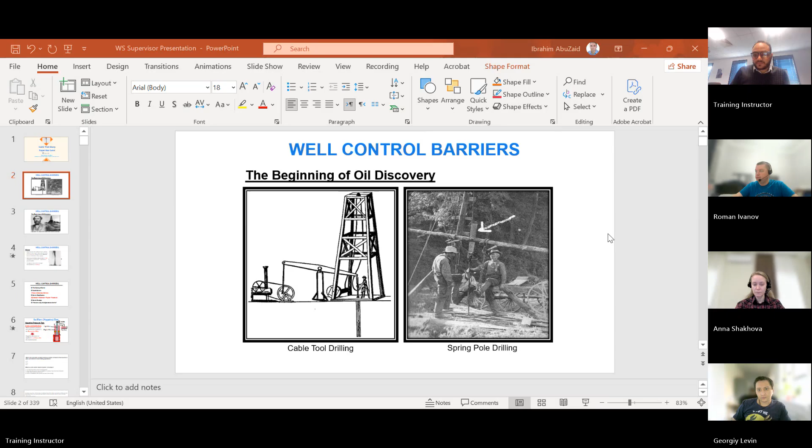Okay, today we are going to discuss the first part of the Well Sharp course. It's about the principles and procedures and equipment. It's a division related to the IWCF. But in the IADC workshop, we are going to start with the first part, which is well principles and procedures. Tomorrow we'll complete the second part, and on the third day we are going to discuss the equipment. On the fourth day, as mentioned in the WhatsApp group, we are going to discuss the simulator training. Okay, let's get started.

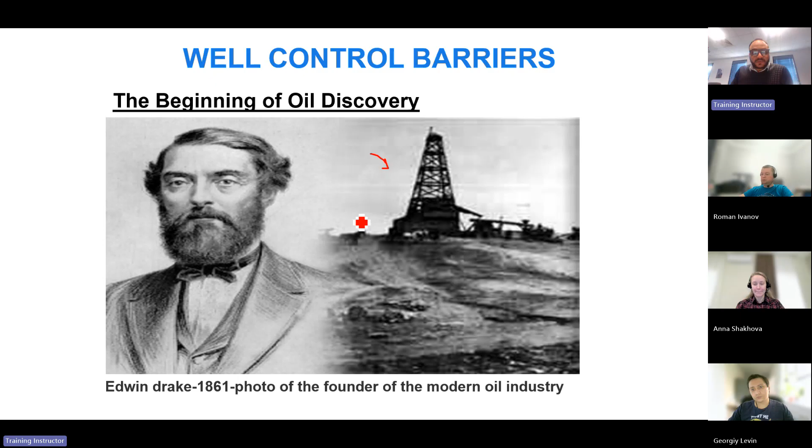As you know, at the beginning of oil discovery, people used old drilling techniques like cable tool drilling and spring pole drilling. After that, Mr. Edwin Drake came and invented this method, and he's considered the founder of the modern oil industry. Then people in this era faced many problems like blowouts, because there was nothing used to close or shut in the well, until Mr. Harry Cameron came in 1922 and invented the first BOP in history. This is the first BOP in history, it was a ram, no annular.

The API, IWCF and IADC came and set the rules of well control in general. And the first rule set by them is double barrier. We must have in all operations a double barrier. So what is the meaning of barrier?

The barrier is an object that prevents unplanned flow from formation to surface. Double barrier means we must have a primary barrier and a secondary barrier. The primary barrier is not always the hydrostatic pressure, or maybe it's a cement plug. So in general, we call the primary barrier the first object that prevents unplanned flow from formation to surface.

It's not always the hydrostatic pressure or the mud weight. Maybe the first object that faces the formation pressure is a cement plug. So to be more accurate, the primary barrier is the first object that prevents unplanned flow from formation to surface. The secondary barrier is the second object that prevents unplanned flow from formation to surface, usually it's the BOP.

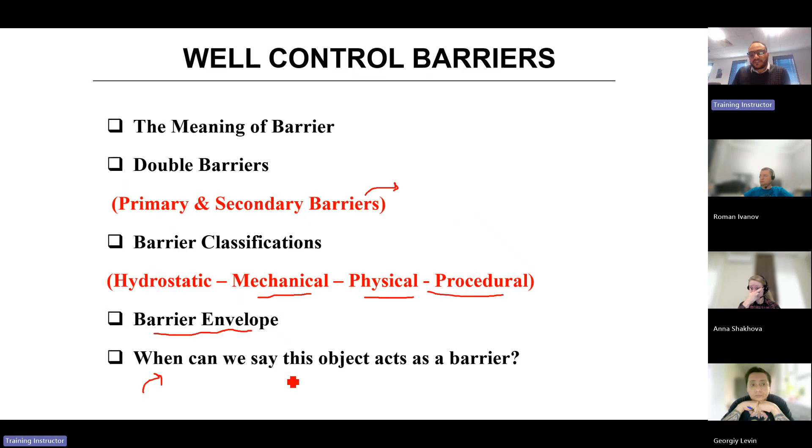To verify this object or any object acts as a barrier or not, it must be tested. So we have a positive test. Positive test means you can operate your pump where? In the direction of flow.

For example, we have a full opening safety valve. You can apply pressure from above and from below. From which direction will it be accepted by IWCF according to the criteria set by IWCF and IADC WellSharp? From the direction of flow, from below.

So I can apply pressure from above and from below on the full opening safety valve, for example, but it's accepted from the direction of flow. This direction of flow is called upstream or formation side.

So if I fail to conduct a positive test, to test this barrier, to make sure it's a barrier, to verify this object acts as a barrier - in this case, if you fail to apply a positive test, just apply a negative test. What is the meaning of negative test?

The IADC WellSharp and IWCF inserted a topic called liner lap. This liner lap is an application about the negative test or inflow test. So here we have a negative pressure test or inflow test.

After running your liner and making your cement job, here we have a packer, a hanger, and packer. Liner, hanger, and packer. The combination of hanger and packer is called liner lap.

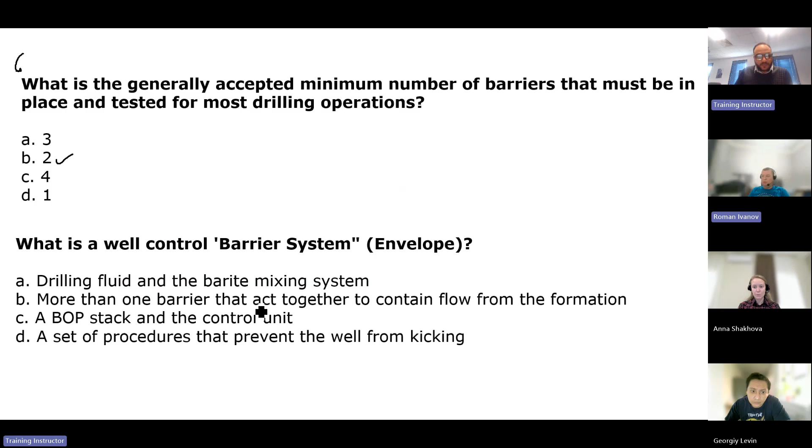Mr. Roman, what is a well control barrier system envelope? This should be B, more than one barrier that act together. Yeah, that's correct, more than one barrier.

Miss Anna, you have a set liner and are now circulating the well to clean mud before drilling out the liner shoe. Where is the potential leak path to allow formation fluid to enter the well? Drill string, BOP, leaking liner. Okay, leaking liner lap or shoe. Yes, C, correct answer. Your turn, Mr. Roman.

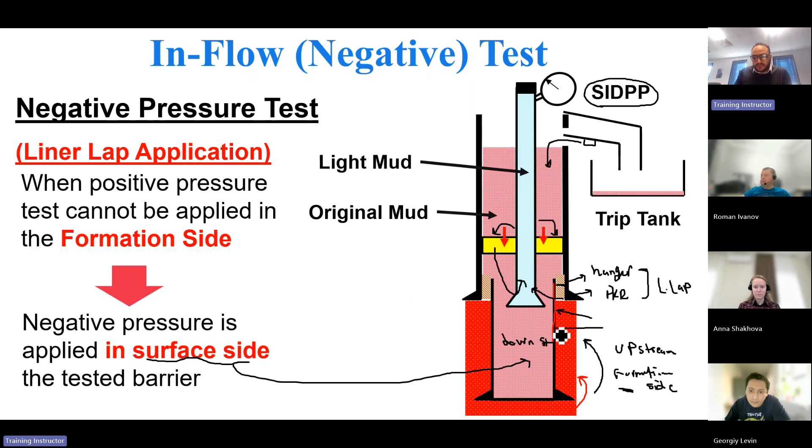Mr. Roman, your turn. Okay, what is a negative test? Just a second. Should be B, yes, B answer. The pressure in the upstream or formation side must be greater than the pressure in the downstream or surface side. Yes, B answer.

Why is a negative test performed on a cement plug or a liner lap, Mr. George? C, to check for cement integrity. Yeah, integrity, the source of leak.

Anna, which of the following is considered a procedural barrier? Maybe monitoring the well for gains or losses. Yes, sure, monitoring for gains and losses.

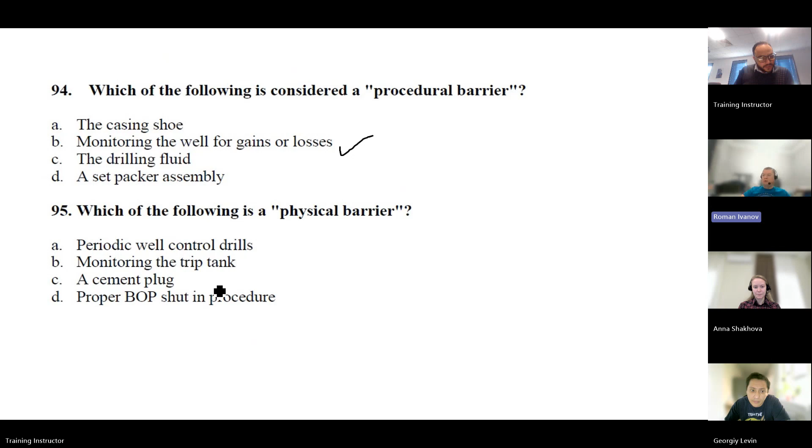Which of the following is the physical barrier, Mr. Roman? Physical barrier will be cement plug. C, yes, cement plug.

Your turn, Anna. If the well is swabbed in when tripping, which type of barrier has failed? Hydrostatic barrier. Hydrostatic barrier, yes.

So this tagging is a method to verify, and this tagging is considered as set by the barrier criteria. Yes. Okay, so negative test, positive test, and tagging.

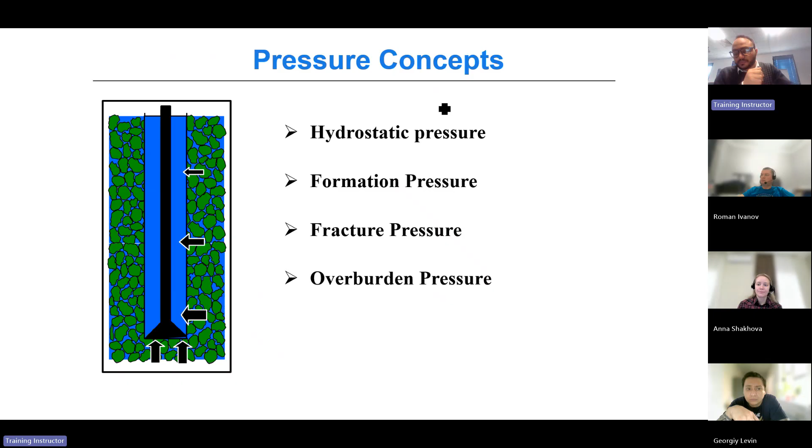Okay, as you know, we'll talk about the pressure concepts. We have a large conflict between the hydrostatic pressure and the formation pressure. The hydrostatic pressure is calculated by this formula: 0.052 multiplied by mud weight multiplied by the true vertical depth. This constant depends on the units of the mud weight and units of the true vertical depth.

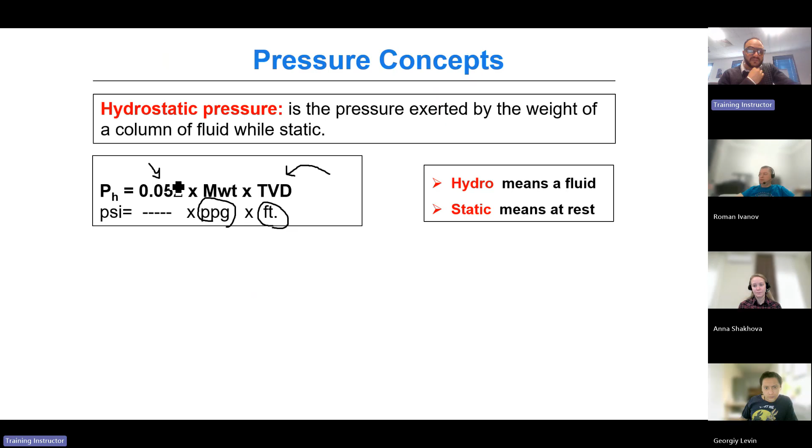If you have the mud weight in ppg and true vertical depth in feet, the constant will be 0.052. And if you change, for example, the mud weight to PCF, the constant will change too.

So the formation pressure is the pressure of the fluid which is in the pore spaces. In all operations, if I want to calculate the formation pressure, how can I know it? If you want to calculate the formation pressure, just use the same equation as the hydrostatic pressure.

Because scientists suppose all formations contain salt water. For example, the mud weight of the salt water is 8.95.

So the formation pressure is different from one area to another. Why? Because we have different depths, different fluids inside the pore spaces, and different stresses. But the scientists assumed that all formations contain salt water. This is the normal case — if you want to calculate the formation pressure, just use the same equation as hydrostatic.

For example, if I want to calculate the formation pressure after 1 drill foot, the formation pressure will equal 0.052 multiplied by 8.95 multiplied by TVD. So at 1 foot, the formation pressure, you will get this value, 0.465. So this is the pressure after 1 drill foot. So each drill foot, your pressure will increase by the same value, 0.465.

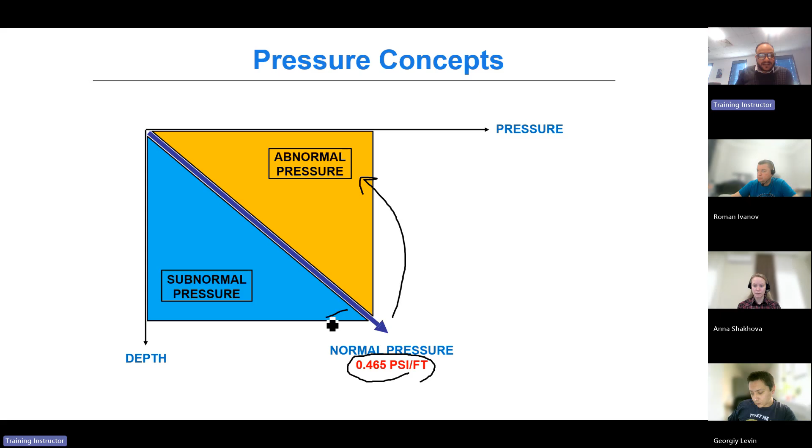So if I want to calculate the gradient, just divide your pressure by depth, or multiply the constant by the mud weight. If the gradient is greater than the normal value, which is 0.465, it's called abnormal or above normal. If it's less than this value, it's called subnormal or below normal.

Yeah, let's discuss these questions about the last part. Mr. George?

If you change mud weight units from ppg to PCF (pounds per cubic foot), what change will you have to make to the formula? Use mud weight to vertical TVD, or replace with a different constant? Yes, we will replace with a different constant. For example, if you want to calculate the hydrostatic pressure using specific gravity instead of mud weight, use 0.433 multiplied by specific gravity multiplied by TVD in feet, and this will give the hydrostatic pressure in PSI. There are a lot of units and constants to keep in mind.

Okay, the second question, Mr. Roman. Hydrostatic pressure is... pressure should be A, stationary column of fluid? No, sorry, C, pressure exerted by a column of fluid, yes. Correct, pressure of the fluid column, yes.

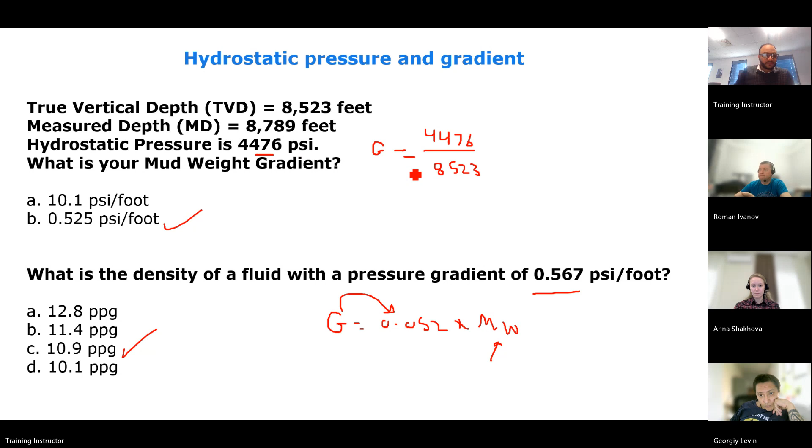Okay, we have 3 cases, as you know. We have the formation pressure greater than the hydrostatic pressure, that's called underbalance. If both are even, it's balanced, and if the hydrostatic pressure is greater than the formation pressure, it's overbalance.

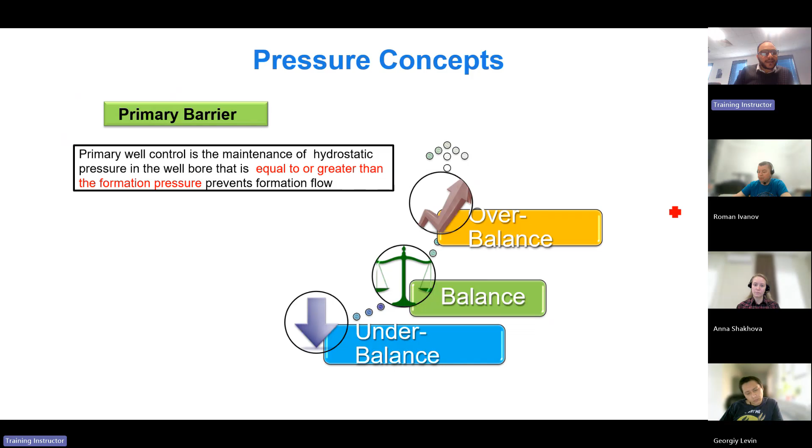Okay, look at this. Let's discuss the question first. Miss Anna.

What is it called when formation pressure is greater than the hydrostatic? Okay, it's overbalance... no, wait, it's under. Underbalance, yes. Mr. Roman.

What is it called when formation pressure is the same as the hydrostatic? Balanced pressure, yes. What is the definition of abnormal pressure formation, Mr. George?

The formation pressure that is greater than the hydrostatic pressure caused by the full column of formation water, and the potential of getting underbalanced in this abnormal pressure formation is high.

And the most important question here: when you have gas inside the well, is it considered a kick or not? No. Okay, how can we confirm we have a kick? We need to do a flow check.

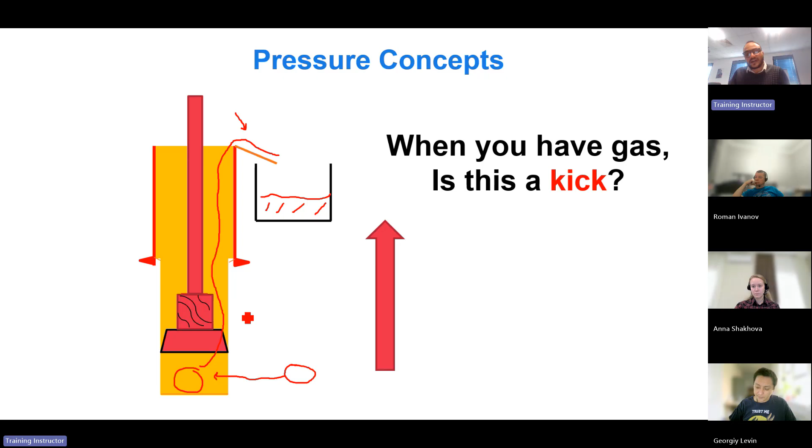Entering of formation fluid into the wellbore is called influx. If this influx causes the well to flow, that means you are underbalanced and you have a kick. The kick means you have an increase in the return flow and a gain inside your tank.

The blowout, as you know, is an uncontrolled kick. Uncontrolled kick means blowout.

Most formations that have to be fractured to produce contain what? Oil and gas? Yes.

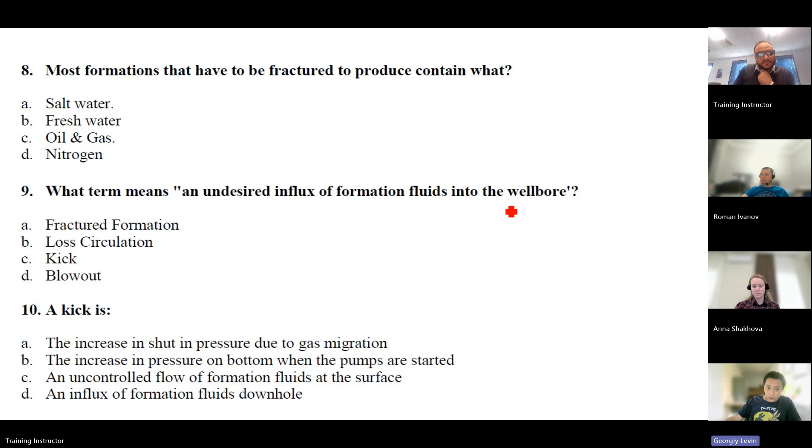What term means an undesired influx of formation fluid into the wellbore? Fractured formation, lost circulation, kick, or blowout? Kick. Yes, kick. Uncontrolled kick means blowout, but undesired influx means kick.

But we have a complement for this definition. Undesired influx causes the well to flow - it must be mentioned. So it's a kick. Anyway, it's a kick.

It's undesired influx, and influx of the formation fluid downhole, yes.

Uncontrolled flow of the formation fluid at surface. Kick?

Uncontrolled, you mean? But why? Uncontrolled means... I would say it's a kick. Blowout - it's a kick, not blowout. It's a kick, okay. This is the definition of blowout, not a kick. Kick, you're correct - it's an influx of formation fluid down.

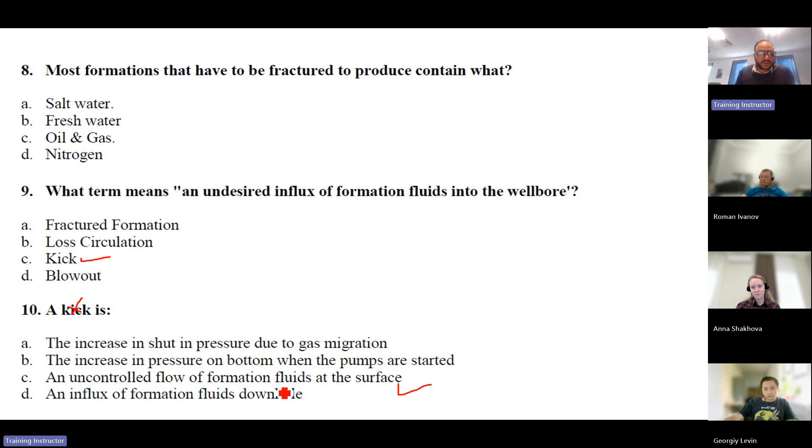What term means uncontrolled flow of formation fluids? It's a blowout. Yes, blowout.

Blowout. Yeah. What is the bottom hole pressure? Mr. Roman, so bottom hole pressure?

The first one, A: total pressure exerted on the bottom of the hole. Yeah, all pressure exerted on the bottom hole - this is the bottom hole pressure.

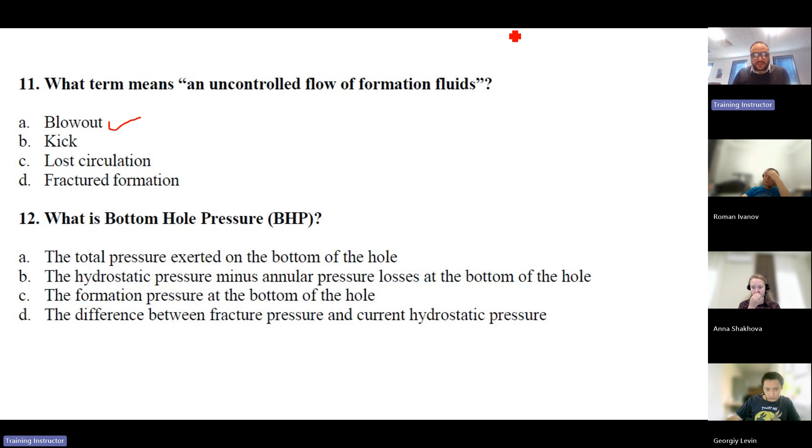The upper limit is the fracture pressure and the lower limit is the formation pressure. If you get below the formation pressure or pore pressure, you will have an influx or kick. And if you exceed the fracture pressure, that means you have losses. After losses, your hydrostatic pressure will drop, then you will have a kick.

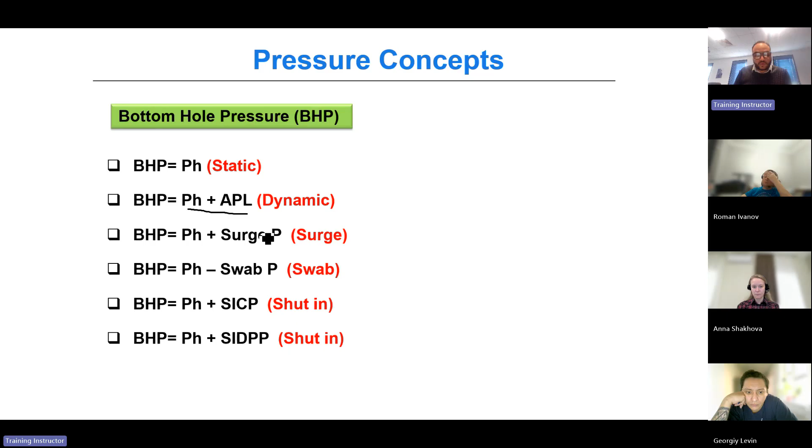In case of surge, running in the hole too fast, it equals hydrostatic plus surge, and hydrostatic minus swab in case of swab, pulling out of the hole too fast. But while shutting in the well, let's take an example here.

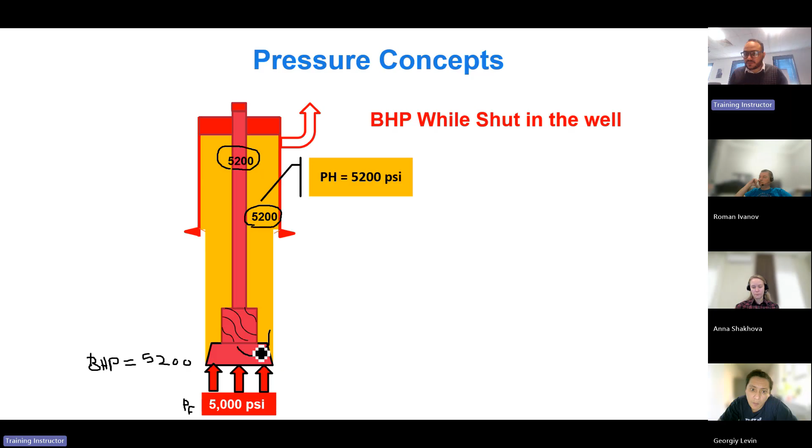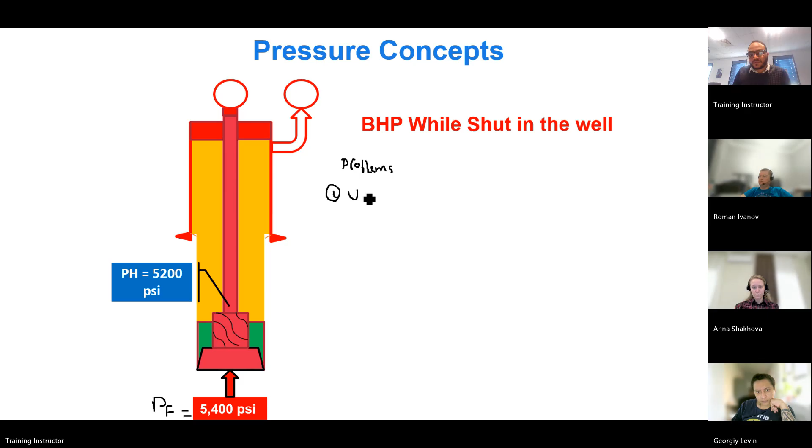After encountering an abnormal pressure formation, the formation pressure here is 5,400 psi. Now, in this case, you're underbalanced. You have problems here. What are these problems? The first problem is you are getting underbalanced. Underbalanced by how much pressure? 200 psi. So this is the first problem.

The second problem is the formation will not let you free - it will give you gas. The gas will enter the string or the annulus. Will the gas go to the annulus? Why? Because in the drill string you have a float valve - but that's not the main reason. Having a float valve, you have a large area in the annulus, but the nozzle of the bit is very small, so the gas will prefer the large area - no gas inside the string. Even if you do not have a float valve, the gas will still be in the annulus. So we have a problem: underbalanced by 200 psi and gas inside the annulus.

Okay, what is the action of the driller now? If you have gas inside the well, the gas will enter the annulus. The hydrostatic pressure inside the annulus was 5,200 psi. The mud is replaced by gas. So entering gas in the annulus affects the hydrostatic pressure of the annulus, not the string. Let's assume it becomes 5,100 psi. So entering the gas inside the annulus reduces the hydrostatic pressure of the annulus by 100 psi.

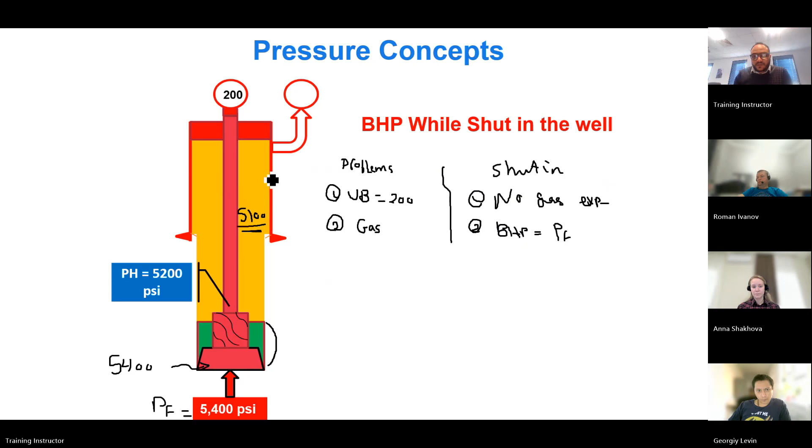If you have a shut-in well, formation pressure equals bottom hole pressure. Let's do it. I have here 5,100 psi from the side of annulus, so I need a back pressure, casing pressure, 300 psi. So this side, the annulus side, is stabilized now. It's equal 5,400. What about the string side? You have a hydrostatic pressure of 5,200 psi, so you need a back pressure of just 200 psi.

What is the value of shut-in drill pipe pressure represent? We can calculate actual bottom hole pressure, formation pressure, based on this extra 200 psi.

Yes, the underbalanced value. So if I tell you the shut-in drill pipe pressure equals zero, that means I do not have a kick. I just have gas inside the annulus, and the casing pressure will be with another value. For example, if you have a shut-in drill pipe pressure of 0 psi, shut-in casing pressure 200 psi, that means you're overbalanced. Why? Because the shut-in drill pipe pressure value represents the difference between the formation pressure and bottom hole pressure, the value of underbalance. So if it's 0, I'm overbalanced.

But now this shut-in drill pipe pressure is 200 psi, shut-in casing pressure is 300 psi. That means the shut-in drill pipe pressure represents the value of underbalance. What about this 300 psi? It's equal to 200 plus 100. This 300, the casing pressure, represents the value of underbalance plus the hydrostatic pressure reduction, which is compensated by closing the well. So the hydrostatic pressure reduction, due to gas entering inside the annulus, is compensated by more closing from the side of the annulus. Does that make sense?

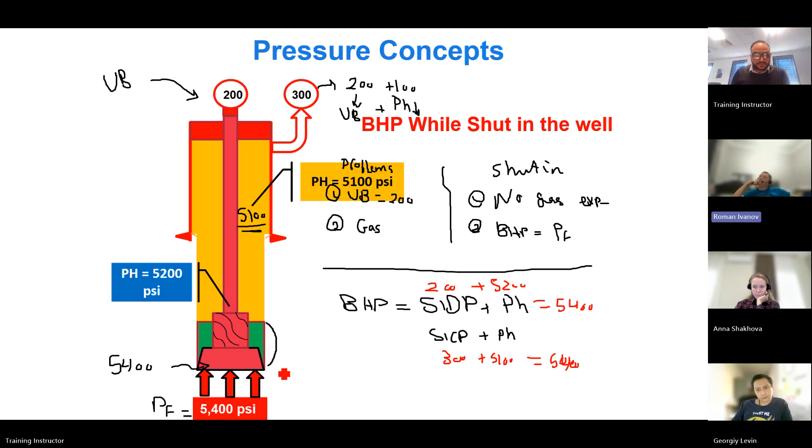Okay, as you can see here, the bottom hole pressure in case of static equals the hydrostatic only. And in case of dynamic, if you have 2,000 psi coming from the pump, you will have pressure losses till you have a large pressure loss across the nozzle of the bit, and you will still have APL inside the annulus. Bottom hole pressure in case of dynamic will be equal to the hydrostatic pressure plus APL.

So now we have a term here. Look at this. If I want to derive a mud weight from the bottom hole pressure, static bottom hole pressure, any pressure you want to convert to mud weight, just take your mud weight and divide the pressure by 0.052 multiplied by TVD, as you know. It's very simple. And this is bottom hole pressure, bottom hole pressure is static.

So this mud weight will be static, and this is the first mud weight we will deal with. We have different mud weights in well control: static mud weight, dynamic mud weight, maximum allowable mud weight, and kill mud weight. We have at least 4 types of mud weights: mud weight static, mud weight dynamic, maximum allowable mud weight, and kill mud weight.

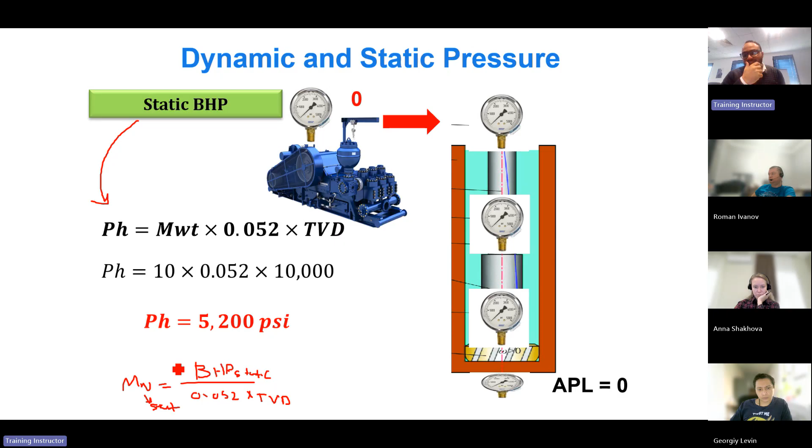Okay, if you derive the mud weight from the bottom hole pressure static, it will be mud weight static. And if you want to derive a mud weight from bottom hole pressure dynamic, it will be mud weight dynamic, which is called what? Annular pressure equivalent circulating density, ECD. So ECD equals mud weight dynamic.

For example, if I tell you the static mud weight equals 10 ppg, and I have an APL of 200 psi, if you convert this 200 psi to mud weight and add it to your static mud weight, you will get the ECD. Let's assume the ECD is 10.3 ppg, and you have a leak-off test conducted on an exploratory or wildcat well, an exploration well.

From this wildcat well, we get the maximum allowable mud weight. If you mix and drill with a mud weight higher than this maximum allowable mud weight, your well will be fractured. So the maximum allowable mud weight is 10.2 ppg. As you can see, you can calculate the equivalent circulating density, or your dynamic mud weight, very easily. But what is the benefit of knowing this ECD value? I need your input.

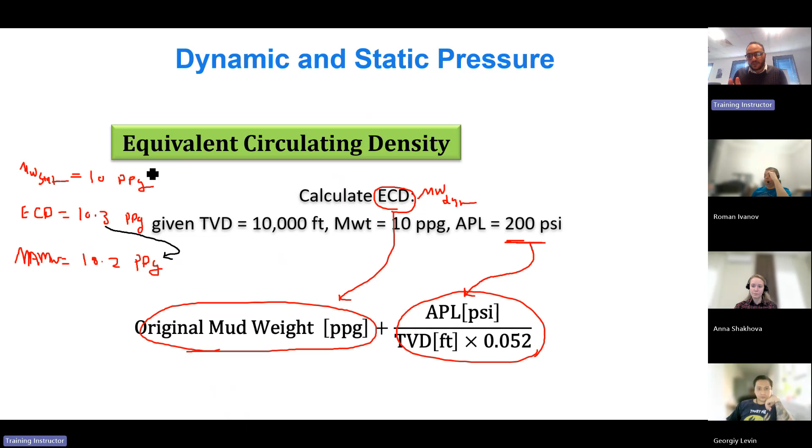But if you operate your pump, what will happen? Your mud weight now, as you can see, is 10.3. You exceed the value of the maximum allowable mud weight. So when you're static, you will not fracture the formation, but when you're dynamic, you will fracture the formation. So the value of ECD is used to compare to the maximum allowable mud weight.

We have simple equations: if you change your mud weight, the pump pressure will change too, and also if you change the strokes per minute, or pump speed, the pump pressure will change too. For example, if you have 2,600 psi pump pressure and you change your mud weight from 10 to 11 ppg, and you want to calculate the new pump pressure, it will equal the old pump pressure multiplied by the new mud weight divided by the old mud weight. P new over P old equals mud weight new over mud weight old. Let's calculate it.

2,600, I think it's calculated here, it's solved here. 2,600 times 11 by 10, this is the new mud weight divided by old mud weight. So this is the new pump pressure.

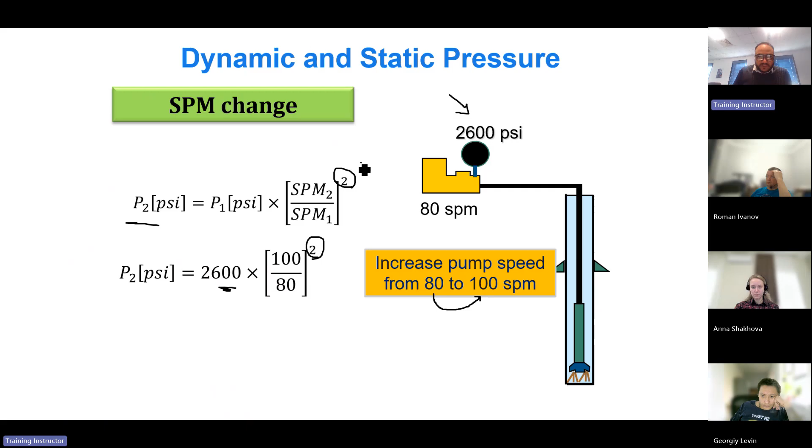Also, if you changed your strokes per minute from 80 to 100 with the same old pressure, you can get the new pump pressure by using the old pump pressure multiplied by the new strokes per minute divided by the old strokes per minute, raised to the power of 2. Don't forget that, please. So this is the new pump pressure.

What effect does increased pressure have on fluid density? What effect does increasing pressure have on fluid density? It decreases the fluid density. It does not affect the fluid density. It increases the fluid density. We didn't explain this, let's explain it now.

If you increase the pressure on fluid density, what will happen? He's asking you about the ECD, equivalent circulating density. If you increase the APL, what is the new value of the fluid density? It will increase, okay, increase, yes. But if you increase the temperature, increasing temperature will increase the viscosity... no, it will decrease the viscosity. So it will lead to barite settling or barite sagging, and your hydrostatic pressure will drop.

So increasing the pressure on the fluid density will increase the fluid density. Increasing the temperature will decrease the fluid density. Make sense? Yes, okay, so it increases the fluid density.

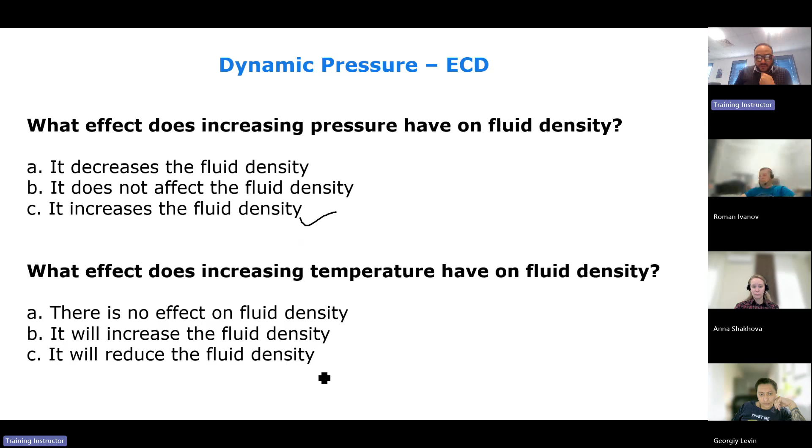What effect does increasing temperature have on the fluid density? It will reduce the fluid density. Yes, Miss Anna.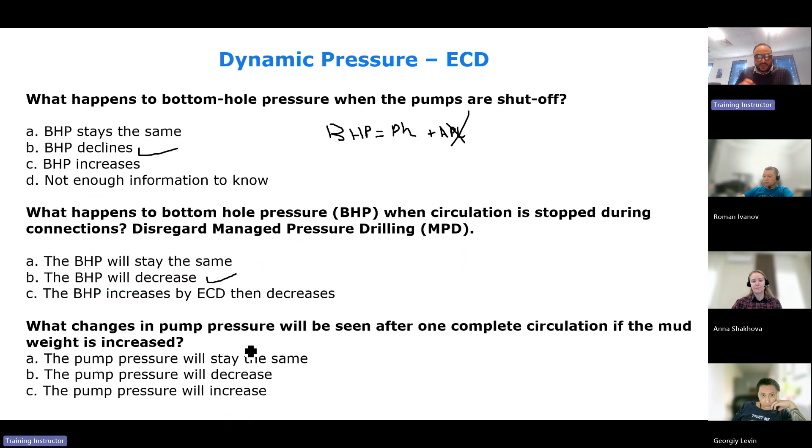What changes in pump pressure will be seen after one complete circulation if the mud weight is increased? Same, decrease, or increase? The pump pressure will increase, since we have a proportional relationship between pump pressure, mud weight, and strokes per minute. So it will increase.

This is one of the most famous questions in the IADC chart: holding 1,200 psi at the surface will have the most effect on mud weight on which well?

Have you remembered the last question about increasing the pressure on the mud weight? Does it increase the mud weight or decrease it? Increase the mud weight. Okay, but what if you have 1,200 psi pressure holding or applied on the shortest well?

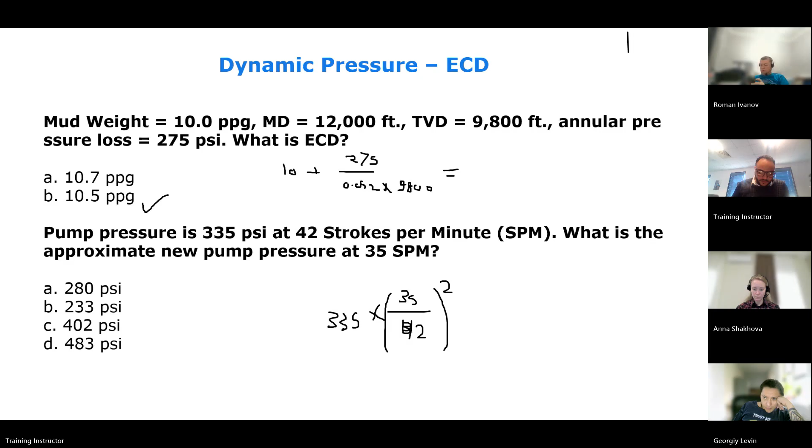35 divided by 42 squared, right? Yes, 35, 42, squared, multiplied by the pressure. 232. Well, it's B if the answer is rounded up. 35 divided by 42, 232, yeah, 233 is rounded up.

Right, yes Mr. Roman. Okay, while circulating a kick, we are instructed to decrease pump rate. Okay, so strokes divide 20 by 25, 0.8, power 2, okay, 0.64. Now multiplying final circulating 320, okay, by 320, 205, D is the answer, rounded up also.

Yes, so George. While pumping at 50 strokes per minute, the standpipe pressure reads 1,250. The previous standpipe pressure will increase, B, 1,800. B is the answer, B. Yeah, okay.

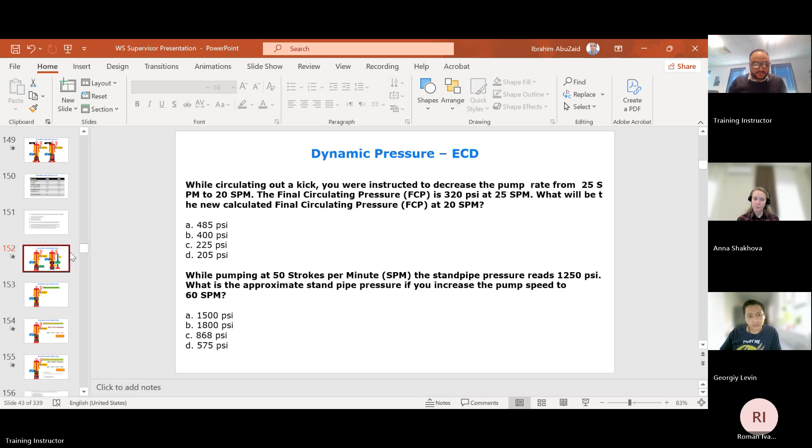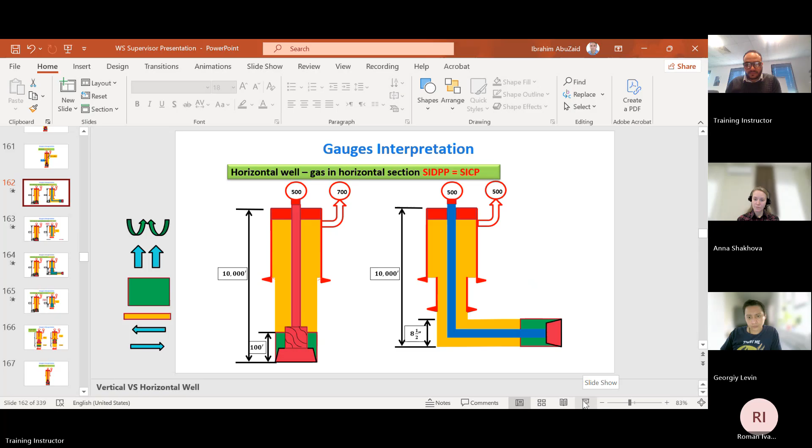We'll discuss it in the gauge interpretation, but I will tell you now. If you have a kick inside the horizontal section, shut-in casing pressure will equal shut-in drill pipe pressure. Why? Because the gas inside the horizontal section has no expansion—there is no expansion for gas inside the horizontal section, so there is no effect on the hydrostatic pressure inside the annulus. So this is the first case of shut-in drill pipe pressure equal the shut-in casing pressure.

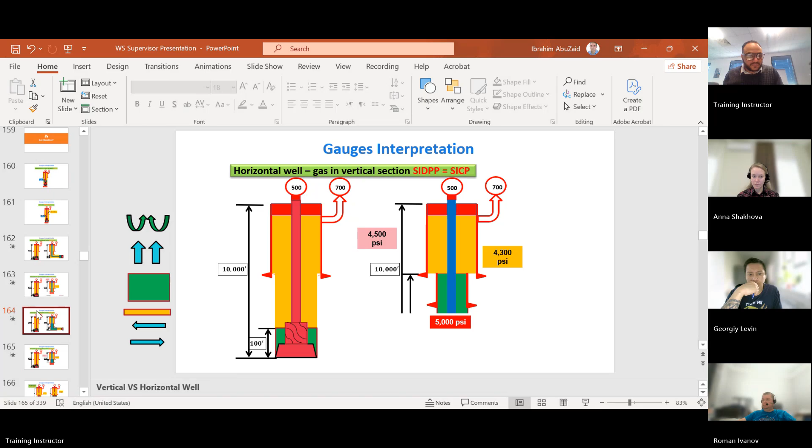And the second case, the casing pressure equals shut-in drill pipe pressure if your string is off bottom and you have a gas, because the effect of gas will be on both. So if your bit is off bottom, shut-in casing pressure will equal shut-in drill pipe pressure. And if you have gas inside the horizontal section, shut-in casing pressure will also be equal to shut-in drill pipe pressure.

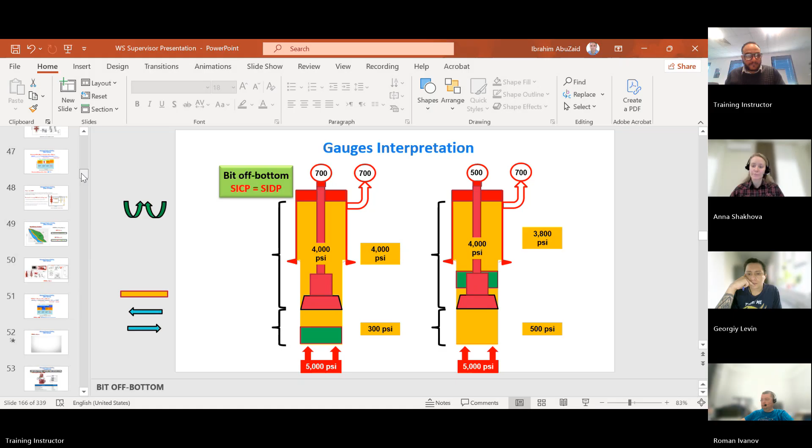We have here theoretical topics like MPD, managed pressure drilling. It's mentioned in the IADC WellSharp as a theoretical topic—there's no more calculations inside it—and also kick tolerance. This topic is not included for your information; it's not included in the syllabus of the IWCF, MPD and kick tolerance are not included in the syllabus of the IWCF.

Here in MPD, managed pressure drilling, we have different types or methods of MPD. But the method mentioned in the syllabus of the IADC WellSharp is called surface back pressure, SBP. We have two types of windows: we have a large drilling window when you have fracture pressure and formation pressure here—a large drilling window.

In case your bottom hole pressure is static, it's equal to hydrostatic pressure only. And in case of dynamic, your bottom hole pressure dynamic equals bottom hole pressure static, which is hydrostatic plus the APL, or friction losses. So this is conventional drilling: bottom hole pressure in case of static equals hydrostatic, and in case of dynamic equals hydrostatic plus APL. And we have a large drilling window in conventional drilling.

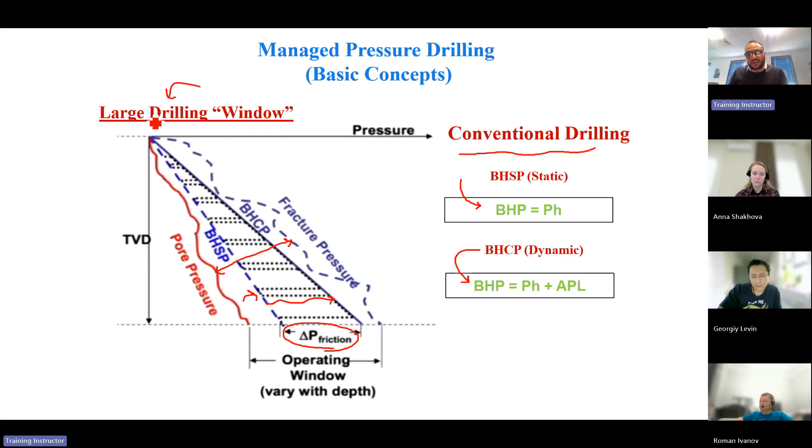If you want to look at the bottom hole pressure and want to increase it, you do not have more choices like MPD, like surface back pressure. In surface back pressure MPD, you can make a manipulation because you have different factors to control. But here, in case of drilling, I only have APL and hydrostatic pressure. During connection, you lose this circulating friction, which is APL—you lose it. So the potential of taking connection gas during connection is high. You cannot increase your bottom hole pressure in case of connection; you don't have the APL, only the hydrostatic.

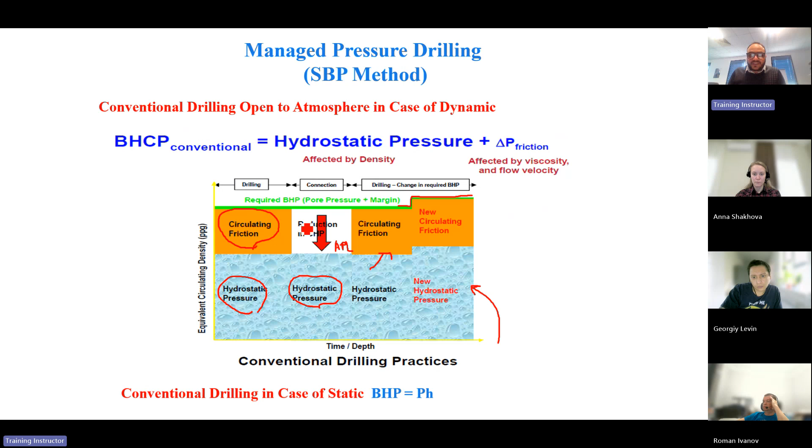No other factors. But in case of MPD, which is a closed loop or closed system, the benefits of using MPD are that it enables us to drill with more consistent bottom hole pressure, and also aids to mitigate pressure-related non-productive time events and enables the well to be drilled within a tight window. Let's discuss it in detail.

So we must use MPD, a closed system. Look at the layout. The bottom hole pressure in the closed system equals the hydrostatic pressure plus back pressure, in case of static, using the closed system MPD. In case of dynamic, it's hydrostatic pressure, back pressure, and APL from the pump.

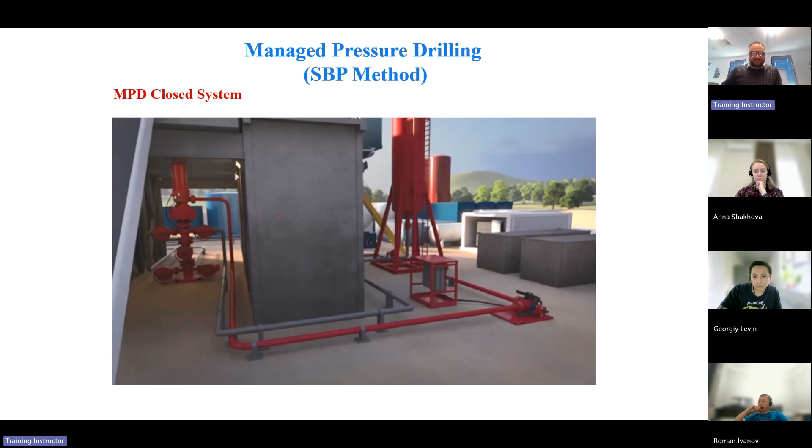Take control of your onshore drilling operations with purpose-built and cost-effective closed-loop technologies. The Weatherford Pressure Pro control system enables basic capabilities for managed pressure, underbalanced, and flow drilling operations, so you can work safer, faster, and more economically.

The system features a Weatherford Safe Shield rotating control device, or RCD, which creates a pressure-tight barrier in the wellbore annulus to contain and divert drilling returns for enhanced safety.

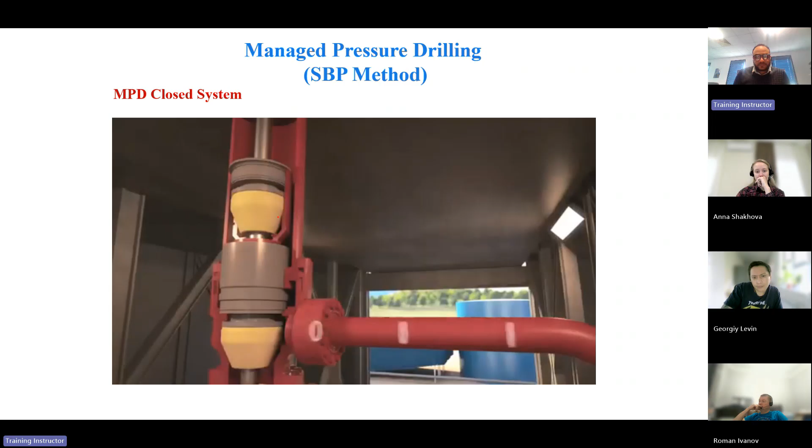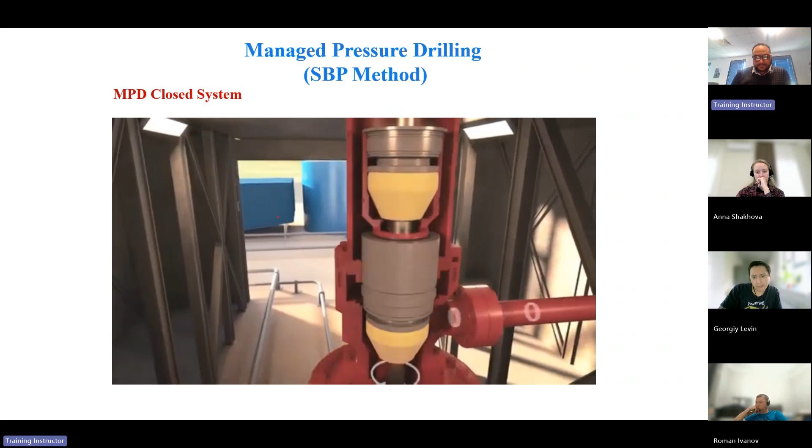Our Safe Shield 5M model offers design improvements in liquid and gas drilling environments, including a short stack height, large through-bore diameter, and high pressure ratings up to 5,000 psi. A remote latching system and a self-lubricating bearing assembly both eliminate the need to work below the floor. A rotating flange reduces rig-up time, and an interchangeable bowl adapts to a range of flange configurations.

The Pressure Pro system also features the electric set point choke, which provides precise semi-automated pressure control that reduces manpower. As pressures vary in the wellbore, the choke automatically adjusts its position to maintain the pressure set point. Our OneSync software platform integrates with the Pressure Pro system so that you can create ramp schedules to increase the accuracy of wellbore pressure management during connections.

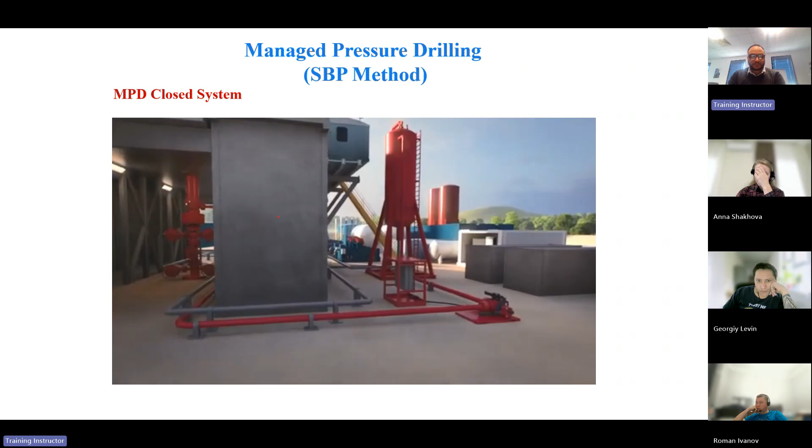With the Weatherford Pressure Pro control system, you can proactively manage wellbore pressures to mitigate well control incidents, minimize non-productive time, and reduce mud costs.

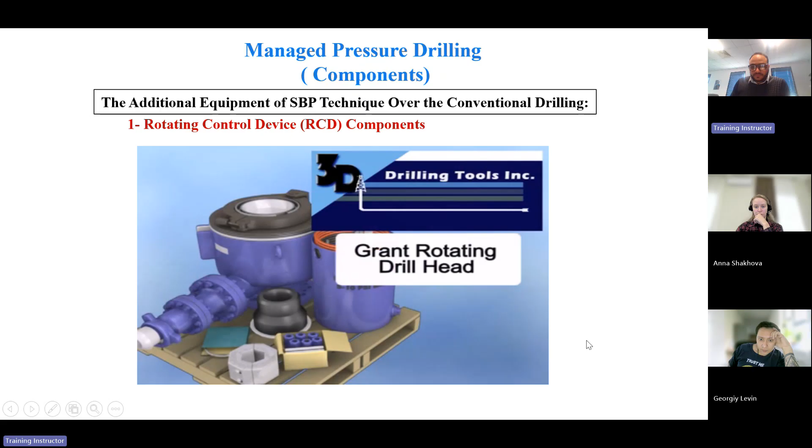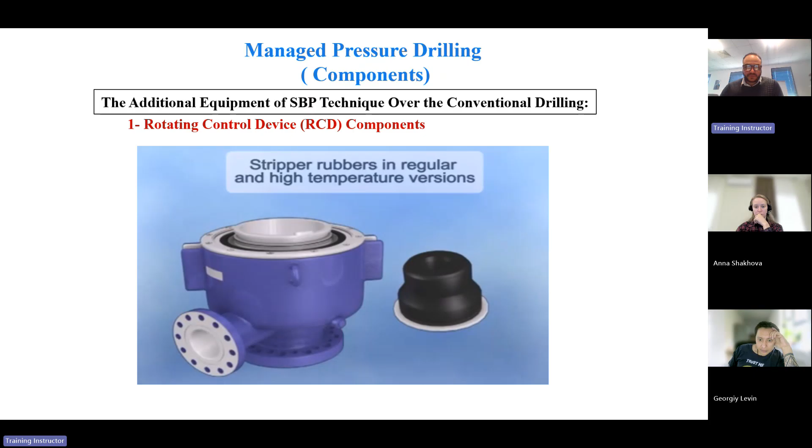Yes, this is a sealing element. This is the rotating head, bearing assembly in the rotating head, and the clamp. And this flange suits the rig.

Okay, this is a rig-up of the RCD, rotating control device, over the annular. This is lowering the RCD bearing to the RCD bowl, or to the rotating head.

I think we missed Roman. Mr. Roman? Yeah, sorry, I got a blackout at home. No, electricity blackout, just reconnected, yes.

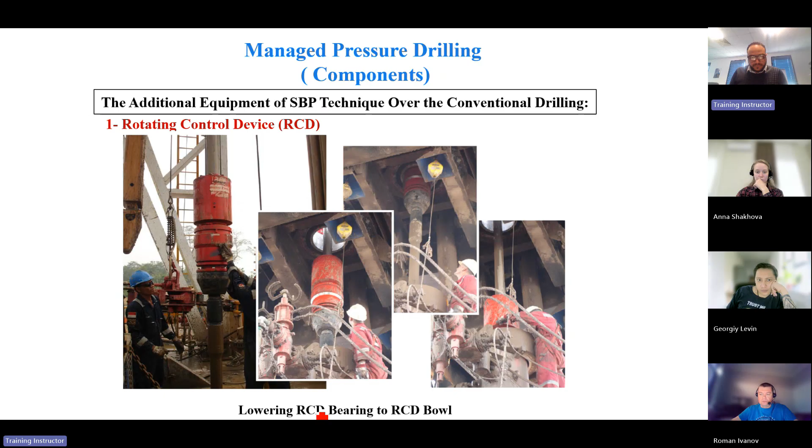No problem. Okay, this is the lowering of the RCD bearing to the RCD bowl. Okay, this is during the rig-up and function test of the RCD.

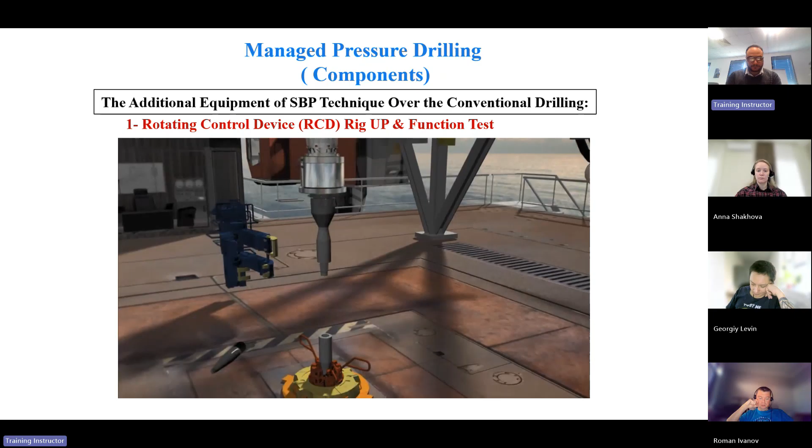Running tool of the RCD sealing element and RCD assembly, bearing assembly. And it will be run inside the rotating head, or the RCD bowl, or rotating head.

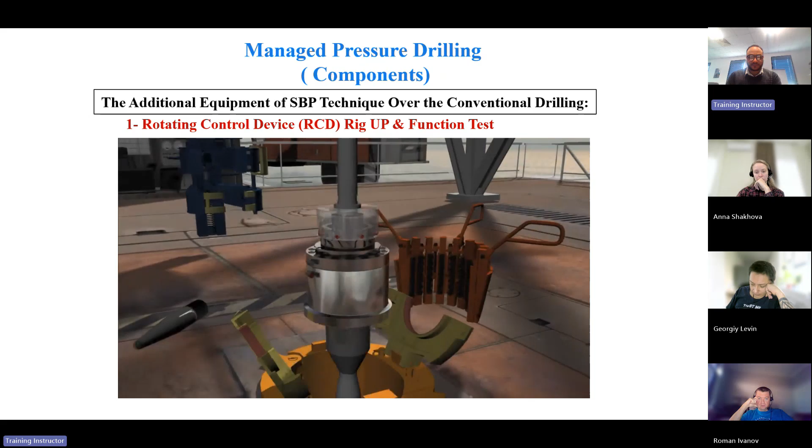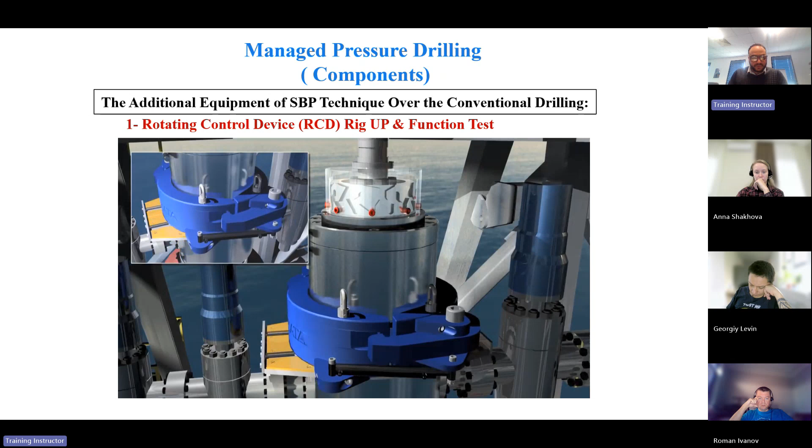Open, look at this, the clamp is open. The sealing element and rotating, or RCD bearing, is set in its place inside the rotating head. This is the component of RCD, rotating control device. It enables you to do reciprocating and rotating, and also circulation through the closed loop.

And this is the sealing element and how to change the sealing element. Look at this.

The first equipment we have talked about is the RCD. The second and third equipment is the MPD choke and manifold. Here we have two drilling chokes on the same choke manifold. This is a backup MPD drilling choke. MPD or drilling choke, both are the same. It's used to hold back pressure during connection or during drilling.

And here we have a Coriolis flow meter. We'll talk about it later.

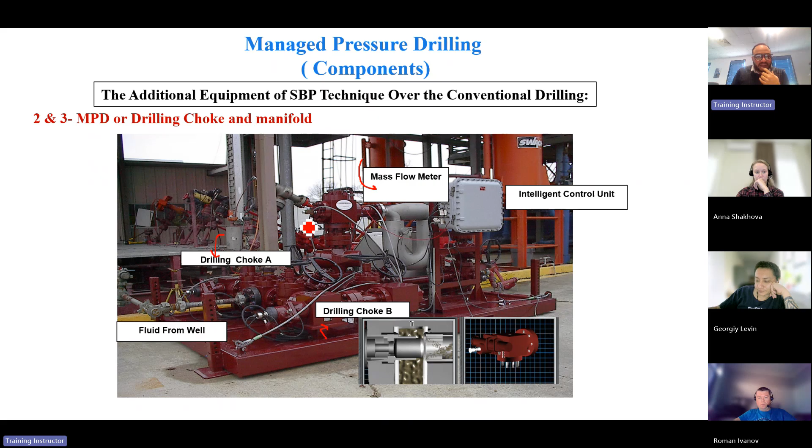Through applying the back pressure, maybe you will have a pressure or a return from the string, inside the string, due to U-tubing. And maybe someone will say we have a float valve to prevent the backflow through the string. But the float valve, as we mentioned, it's not a tested barrier, so it's not considered as a barrier.

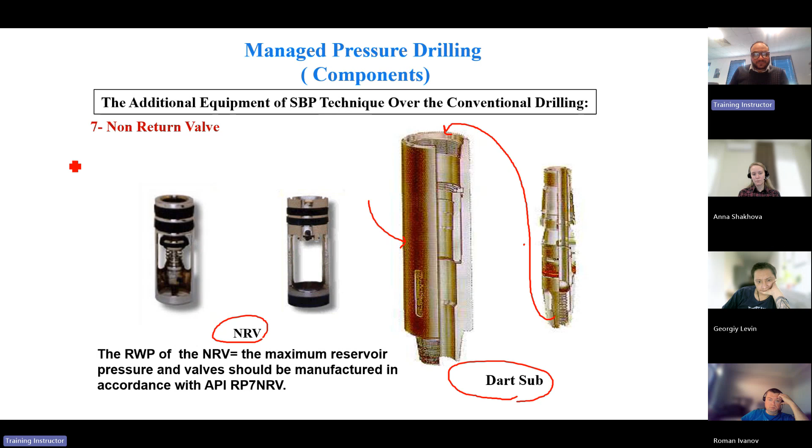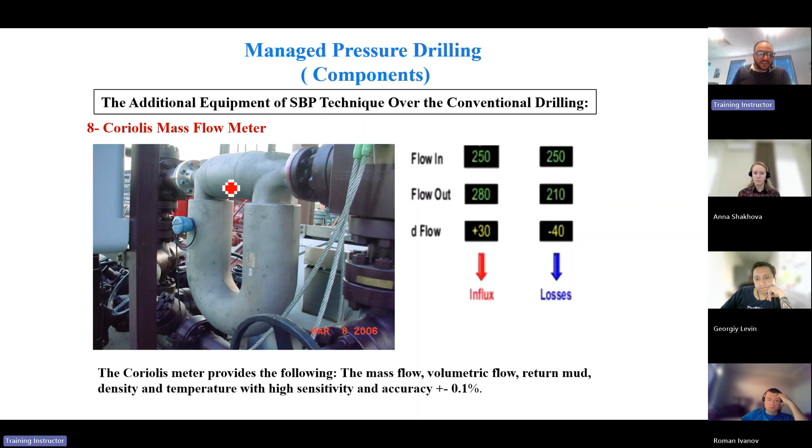And here we have a Coriolis flow meter. This is a very sensitive flow meter. It discovers the gains and losses even if you have, for example, 18 gallons — not 1 barrel, 18 gallons. Very sensitive flow meter. It's mounted on that choke manifold. This is the shape, the photo of the mass flow meter.

Okay, Coriolis flow meter. And yes, we have here the ICU. It's the brain of this system. All data is acquired and directed to it.

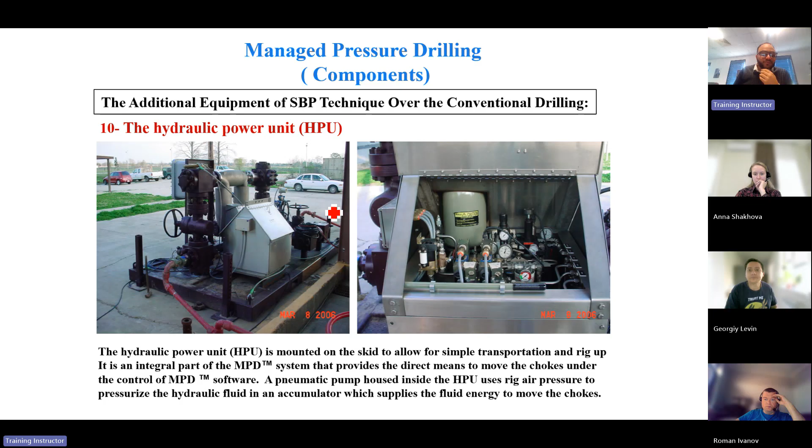And here we have an HPU, considered as the SWACO unit, but it's located on the skid. Yeah, it's an integral part of the MPD system that provides the direct means to move the choke under control of MPD software.

And here we have the HMI, human machine interface. We have real-time drilling acquisition and control compression, and human machine interface, including the control operator panel, drillers panel, and remote panel.

Okay. Let's take an example to understand the MPD deeply and how it gives us a solution for the well control situation very quickly.

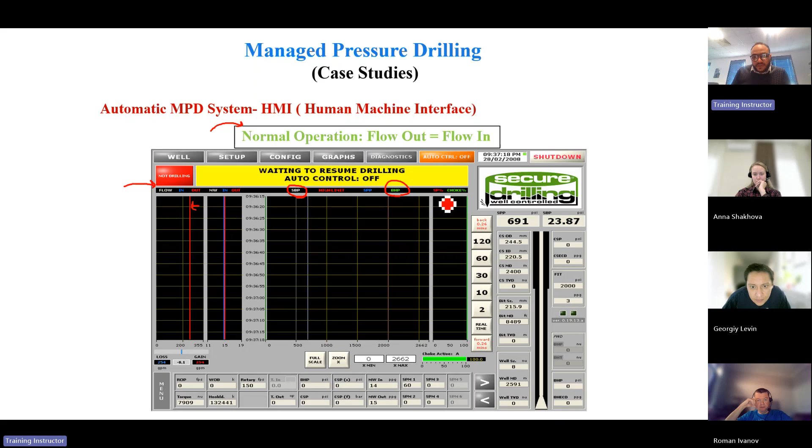This is a normal operation which appears on the rig sense of MPD. Here we have the flow. This is a normal situation: flow in must be over the flow out, one line, like this. And here we have the surface back pressure, bottom hole pressure, and choke position. This is the normal operation.

Look at this. In case of losses, the flow out will be less than the flow in. So to solve this problem, I need to open the choke to decrease the surface back pressure, to decrease also or reduce the bottom hole pressure.

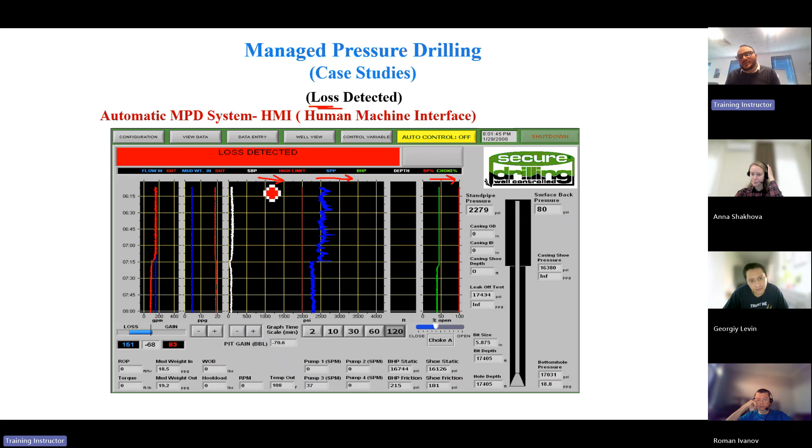You imagine, in case of conventional drilling, if you have a flow out greater than the flow in, that means you have a kick. In this situation, in conventional drilling, if you have a kick, you will shut in the well, record shut-in casing pressure, shut-in drill pipe pressure, pit gain, TVD. Then you will prepare your kill sheet, then prepare your well to be killed — the killing procedure.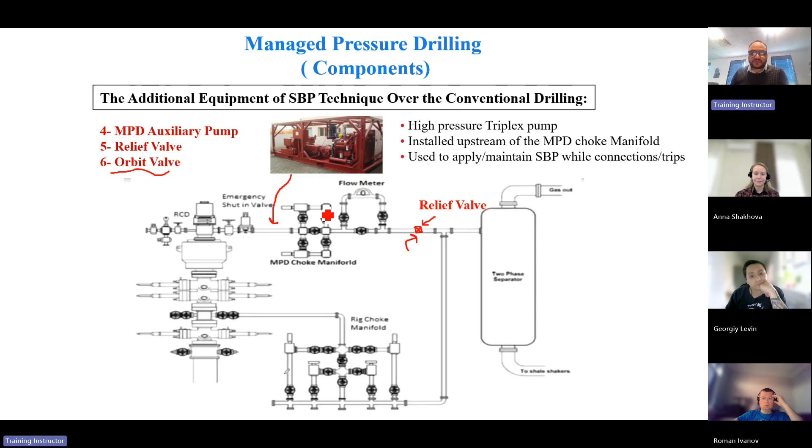Which are not main components of an RCD system? Bearing assembly. Look at this - because for that you have a rubber to seal against the pipe, right? Then you do have... this is the RCD bearing, and this is the bearing assembly.

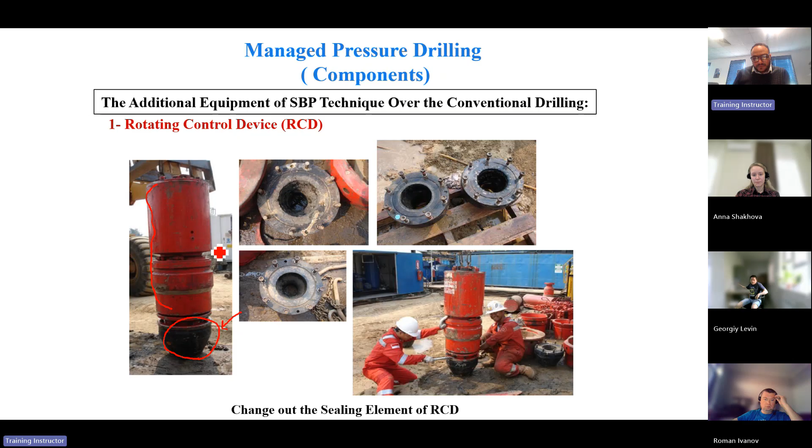This is called the bearing assembly, the sealing element, and this is the rotating head. So the components of RCD are: rotating head, bearing assembly, and sealing element.

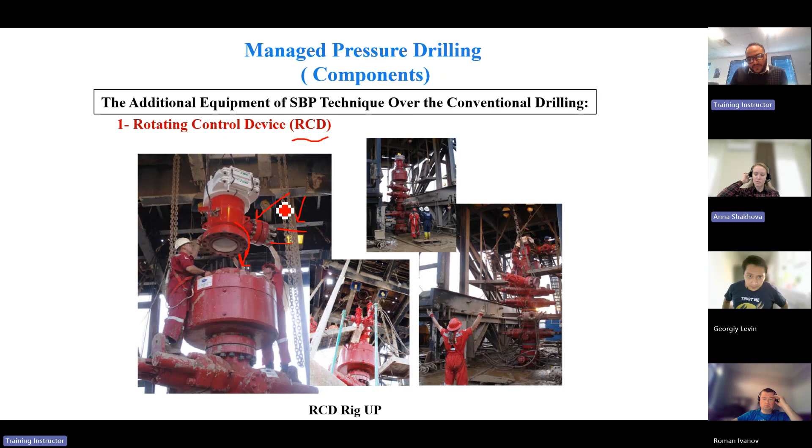So which is not a component of RCD? The orbit valve on the flow line. If the question is about the component of MPD or closing loop, you will select the orbit valve. It's not a component of the RCD, but it is a component of MPD.

Rotating head used while MPD drilling gives us the ability to safely accomplish what while drilling? All of above. Keeping formation pressure over bottom hole pressure all the times?

No, not all the time. Allows lower mud weight - that's the correct answer, B.

Close on the well in case of a kick? No, it's not applicable by the MPD.

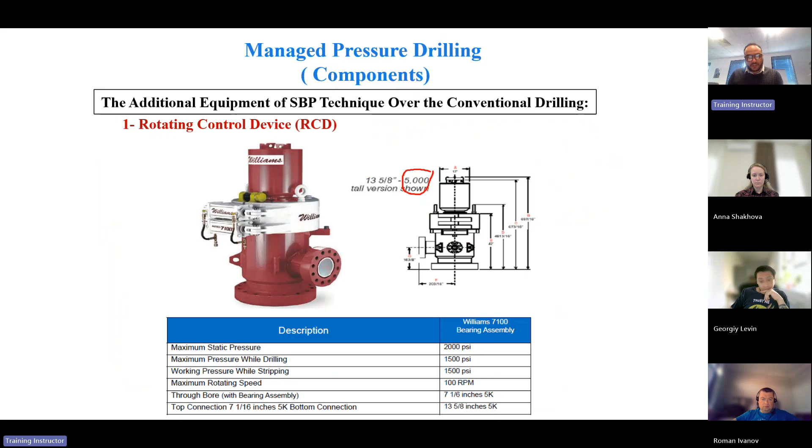How can you tell how much pressure the rotating head is holding? It was mentioned 5,000 rating - this is the maximum, and it's not considered as a barrier. If you want to know how much pressure this RCD is holding, just open the HCR and read the casing pressure.

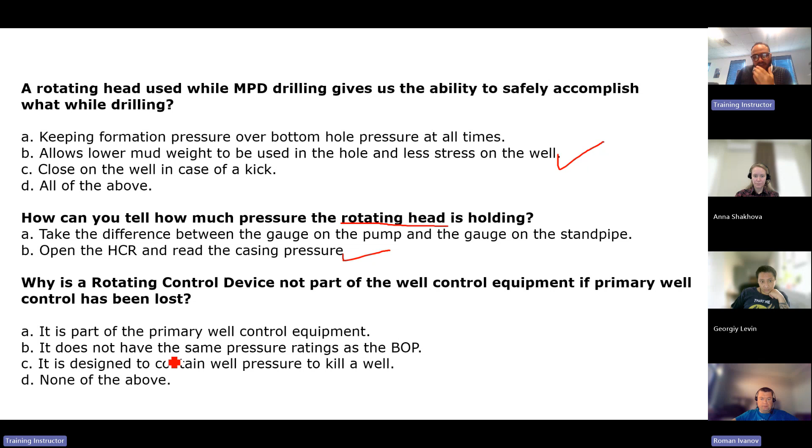Why is a rotating control device not part of the well control equipment if primary well control has been lost? As part of the primary well control equipment, it does not have the same pressure rating as a BOP. It is designed to contain well pressure to kill a well. None of the above. We have a correct answer here - B, because it doesn't have the same rated working pressure of the BOP.

With a rotating head and orbit valve, what level of underbalanced drilling can we safely accomplish? Underbalanced meaning that our formation pressure is more than the bottom hole pressure, right? So with managed pressure drilling, we can keep bottom hole pressure equal to formation. So I would say A.

To compensate for ECD, I think - yes, B. With a rotating head and orbit valve, what level of underbalanced drilling can we safely accomplish? It's to compensate losses of ECD by closing the orbit valve during connection to hold the back pressure. But MPD is used to keep the bottom hole pressure nearly equal to the formation pressure - that's also correct, but he's asking about the orbit valve.

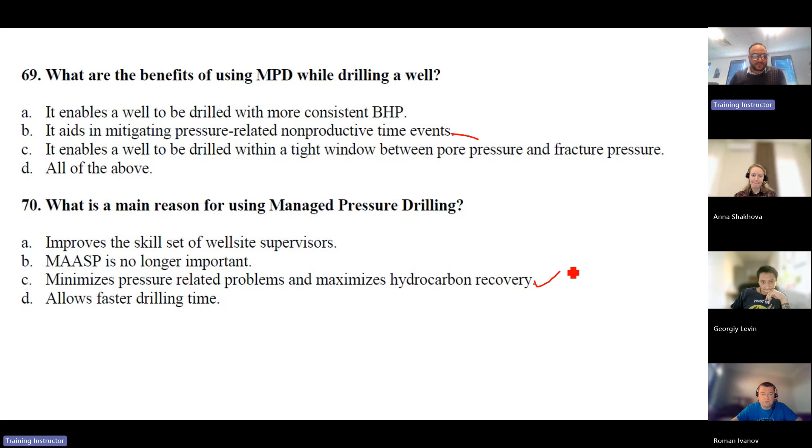Let's discuss kick tolerance, and then we'll take a break, okay? It's a very simple topic, inserted also theoretical here, no calculations. The calculation of kick tolerance is not included in the syllabus of the IADC WellSharp - no calculations for kick tolerance. What's the meaning of kick tolerance? I need your share, Mr. Roman.

Kick tolerance is the maximum volume of kick which we can take and circulate out without breaking the casing shoe, the weakest point. So it's the maximum kick size that can be taken and circulated without fracturing the weakest point, which is the casing shoe.

But at given what? At given depths, because it's planned, and also at given kick intensity. What is the meaning of kick intensity? Kick intensity means the difference between the formation pressure and the hydrostatic pressure, or the planned underbalance value. So the more the kick intensity increases, the kick tolerance will decrease. We have an opposite relationship between the kick intensity and kick tolerance.

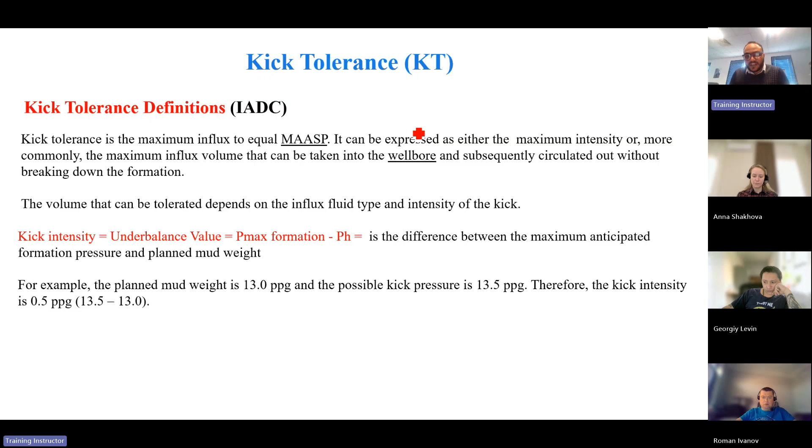Also, if you increase the depth or increase your mud weight, what will happen to the kick tolerance? It will decrease also. If we increase mud weight, it will decrease. Why? Because we have a relationship between the MAASP and kick tolerance.

The MAASP is the total of the kick tolerance budget. MAASP equals the fracture pressure minus the hydrostatic. If you increase your mud weight, what happens to this MAASP? It will decrease. So we have an opposite relationship between increasing the depth, increasing the mud weight, or increasing the kick intensity with the kick tolerance. If you increase the depth, increase the mud weight, or increase the kick intensity, your kick tolerance will decrease.

For more understanding, as we mentioned, the shut-in drill pipe pressure represents the value of underbalance. If the shut-in drill pipe pressure is 500 psi, that means this is the kick intensity, the difference between the formation and hydrostatic, or the formation and bottom hole. This is the value of underbalance. And if you have a casing pressure of 600 psi, that means I have 500 psi underbalance or kick intensity, and the size of the kick or gas bubble can replace mud equivalent to 100 psi. Does that make sense?

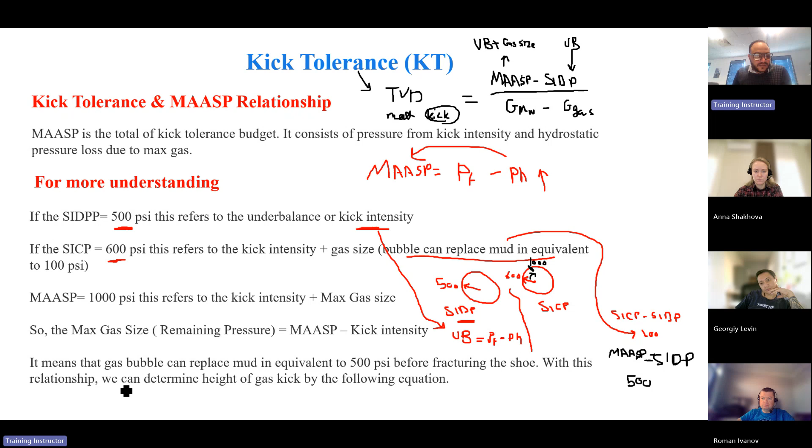The maximum hydrostatic pressure reduction due to maximum gas size divided by the gradient of mud weight minus the gradient of gas. Look at this: the units of this gradient are psi per feet, and the unit of this will be psi. You will get the maximum TVD.

So we compare the MAASP to the shut-in drill pipe pressure, because MAASP equals the maximum gas size plus the maximum kick intensity, or the underbalanced value, which is represented by the shut-in drill pipe pressure. I don't need the kick intensity, I want to calculate only the maximum kick size. How can I calculate it? Just remove the value of underbalance, and you will have the maximum kick size. Does that make sense? Okay.

When to calculate the kick tolerance? It's theoretical, not mentioned by the IADC WellSharp, but after leak off test we can do it. Throughout the whole section interval we can calculate it. If any factor of mud weight changes, we can calculate it. And if the geometry of the well changes, we can calculate it again. To calculate the kick tolerance, we must have this.

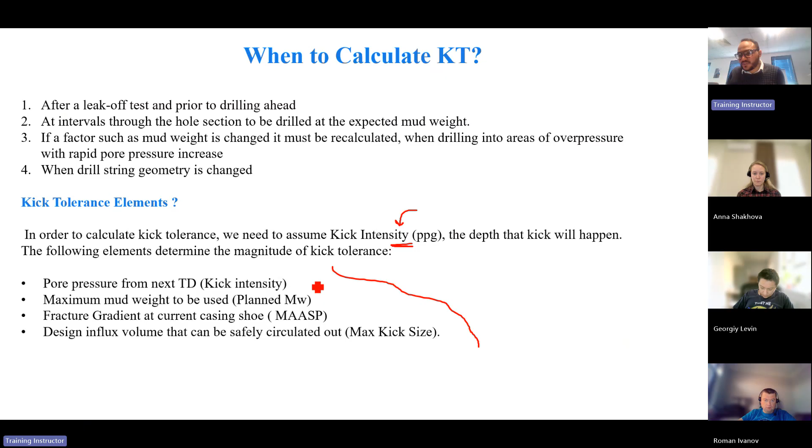To calculate it, we need the kick intensity. We assume the kick intensity value, and it's different from company to another. Maybe 0.5 PPG you get underbalance, maybe 0.6 PPG you will get underbalance. And the kick depths, and the depths that the kick will happen at, and the following elements determine the magnitude of the kick tolerance. The calculation of kick tolerance is not included in the syllabus of the IADC WellSharp.

Mr. George, what is the kick tolerance? The required pressure rating of the maximum tolerable surface pressure. I think the maximum volume of influx in the well bore that can be taken at a certain depth without exceeding fracture, without giving depths. C, the maximum volume of influx, yes, can be taken.

Miss Anna, okay let me read first. B answer, for a given kick intensity and particular depth, yes. But before calculating the kick tolerance, we must assume the kick intensity and the given depth and planned mud weight, and know the value of MAASP.

What is meant by the kick tolerance at 25 barrels, Mr. Roman? Yeah, this is A. Based on choosing kick intensity, a gas kick of 25 barrels maximum that can be shut in and circulated without breaking formation.

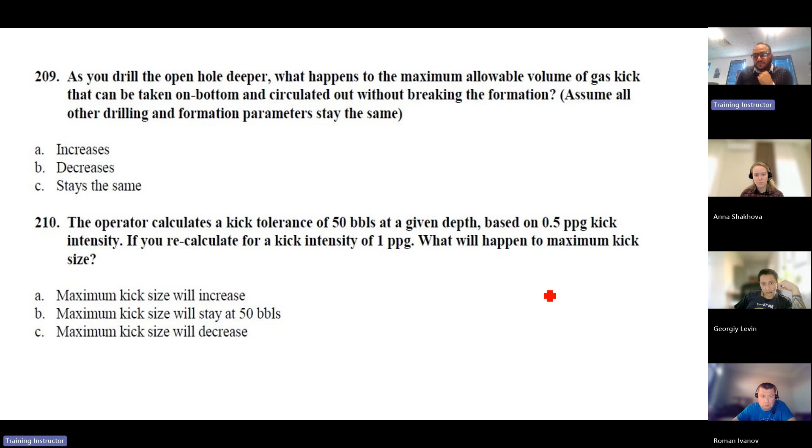Sana, I think it will increase. If you increase the kick intensity, what will happen to the kick tolerance? It will decrease.

Miss Anna, look at this. If you increase this value, kick intensity, consider it as the shut-in drill pipe pressure, which is the underbalanced value. If you increase the shut-in drill pipe pressure in this equation, what will happen to this TVD of gas? It will decrease. So the kick intensity, if you increase it, or if you increase the depth, the kick tolerance will decrease.

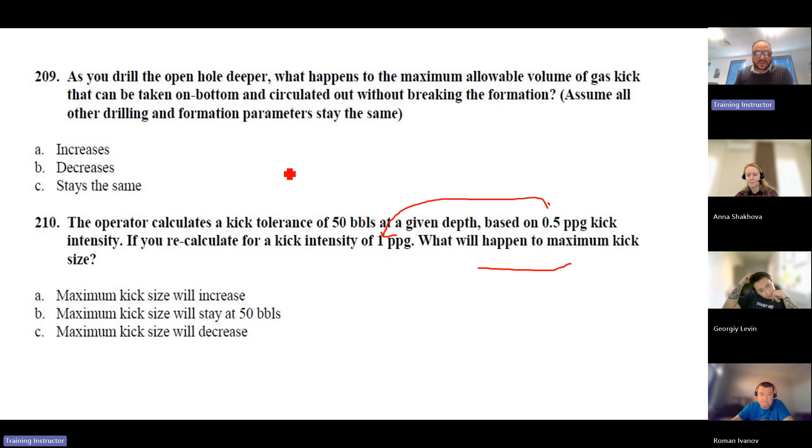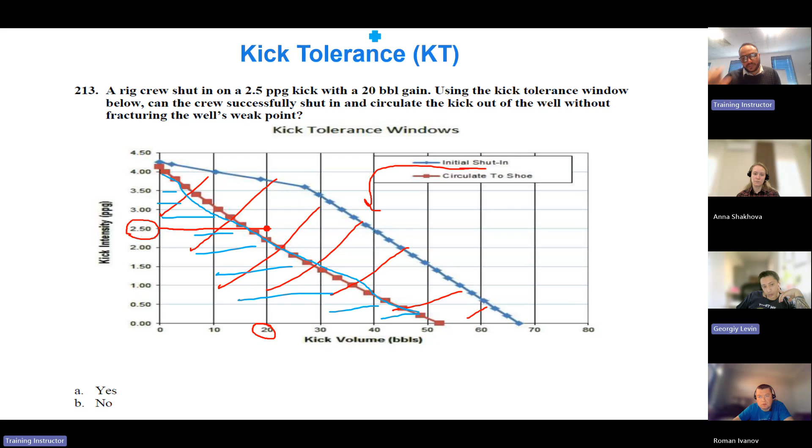Okay, but look at this. Can you circulate? No, you cannot circulate because it's out of this line. Make sense? Yes, you can shut in, but you cannot circulate. I can, but not circulation. So the answer is no, B. Yes, no. Okay, any question?